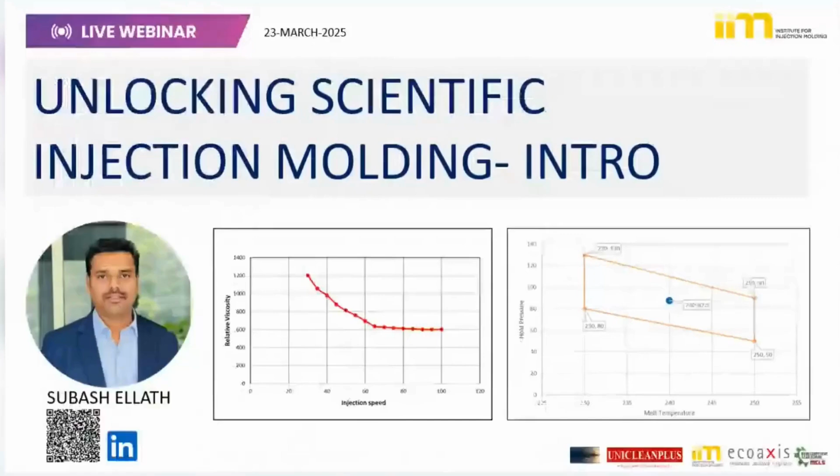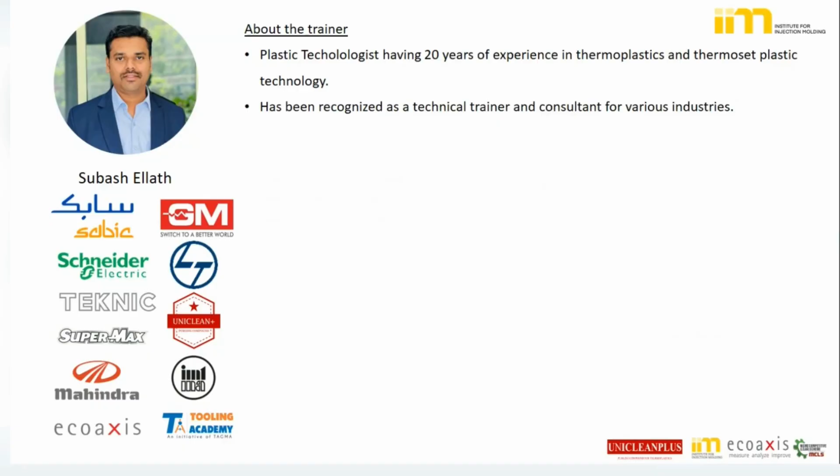I've been in plastic technology, thermoplastics and thermoset plastic technology for 20 years now, and have taken trainings in multiple OEMs. I have hands-on experience in mold design, product design, mold making, rheology, mold flow, plastic raw materials, application development, injection molding process, molding machines, mold trials, troubleshooting, and SOPs and setting up systems.

Recently, for the past 5 to 6 years, I have been offering training in many OEMs in India and tooling companies. I worked with Supermax, the razor manufacturing company, then Teknic, Larsen and Toubro, then Schneider Electric, Sabic as All India Technical for Specialty Portfolio, and GM Modular. I've also been associated as a trainer at Mahindra & Mahindra, IMTMA, and TAGMA.

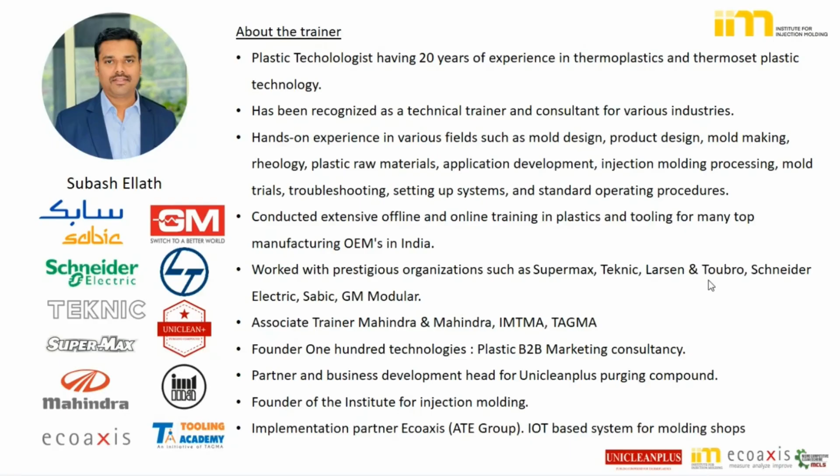Actually, I started the training with a vision. I used to travel a lot in the industry, attending problems, and I'd see that the problems keep repeating - the same customer, multiple customers, also the same problem. So how can one person go and attend to all of it? It's not possible. That's why I became a trainer.

My vision is to advance the Indian plastic industry, molding and tooling industry. Currently we are struggling to qualify, struggling to export critical parts. When we talk about fit and function parts, yes, we can. But when we talk about critical parts which need repeatability or very close tolerance, India is still not an option for the globe. So my intention is to bring that capability in India.

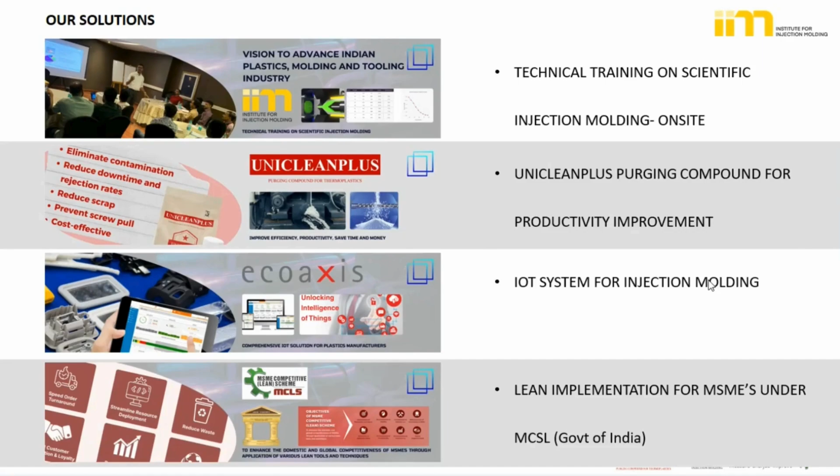So currently our solutions: we take technical training in companies, second, we supply Uniclean Plus Purging Compound, and IoT driven EcoAxis, and lean implementation. Government of India - our organization is a lean implementation partner for QCI, Quality Council of India, under the Government of India initiative of MSME, MCSL.

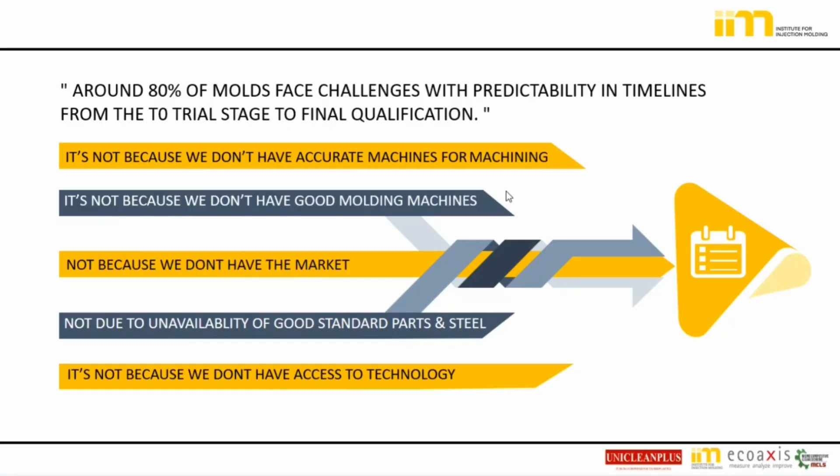And it's not because we don't have access to any technology - we have good technology machines, access to rheology platforms, raw materials, everything is there. Then still, why are we struggling? What is the real challenge? This is as per my observation, and the basic challenges we are facing.

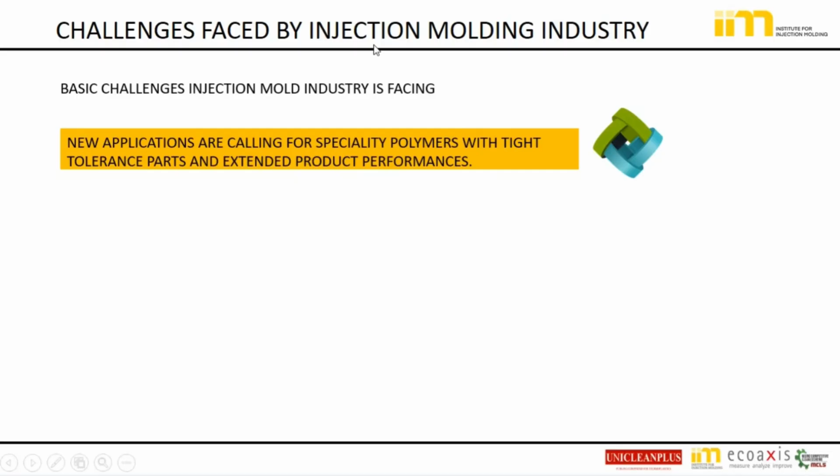There are a lot of new applications coming up nowadays, and instead of commodity plastics, nowadays the arena of specialty plastics, higher-end plastics, polymers with tight tolerance - which require a tight tolerance pattern, or extended life, more life expectancy - this is one of the challenges.

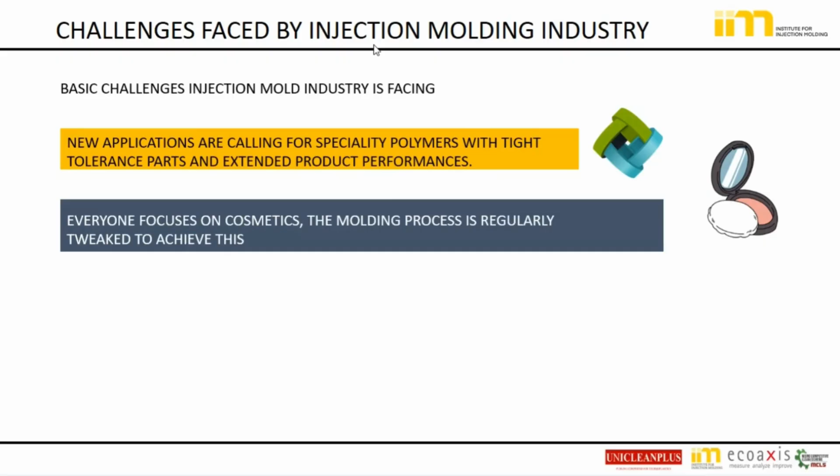Everybody - I openly tell you - everybody is focusing on cosmetics, how the part looks, rather than function. The cosmetic appearance is achieved by adjusting the molding process. The molding process does not have any window, and we keep on adjusting the molding process. The molder is so much dependent on this to get a good part. There is a huge skill gap. Mold making industries have become like an experiential craft.

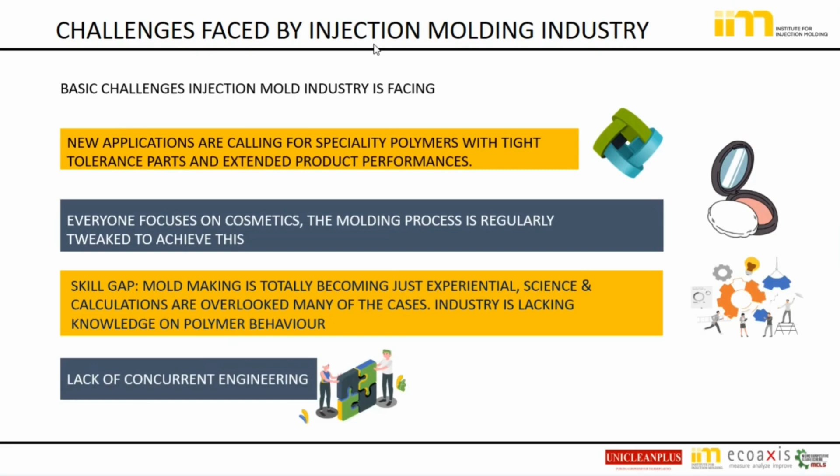It's like we tell it's a real science, but the science has become like an art, and the science and calculation really overlooked many of the cases. Industries are lacking somewhere in related knowledge of depth of polymers and lack of concurrent engineering, because interdepartment, design department may have some knowledge, molding people have some knowledge, tooling people have some, product design has some knowledge, mold flow people have some knowledge. We are not converging, and interdepartment concurrency is not happening because there is some gap in the knowledge. One person's language, the other person or department is not able to really understand. That's the thing I observed, and for this reason, I started to research, train, and started making.

Now we directly go to what is the real expectation from an injection mold or a molding, whatever it is, for any manufacturing if you consider. So the real expectation is consistency. If I tell the consistency means, whatever today I produce, tomorrow if I produce from the same mold, it should have the same dimension. Consistency can be dimension, cosmetics, how it looks, performance, overall quality, mechanical property, thermal property, electrical property - whatever I am producing now, it should be repeatable, it should be consistent. So consistency is the real expectation. Some people wish to know about molding, wish to know about product design, but the industrial requirement or the real expectation of the whole industry is getting part repeatability, so that our life will be easy, we can run the part very easily. So that's how this can be achieved as a question mark, but this is the real expectation of the industry.

See, when I talk about consistency, there are 3 levels of consistency if we consider a mold as far as a mold is concerned, as far as molding is concerned. First level of consistency is cavity to cavity consistency. Courtesy to Suhas Kulkarni, FimmTech, I've taken this from his teachings.

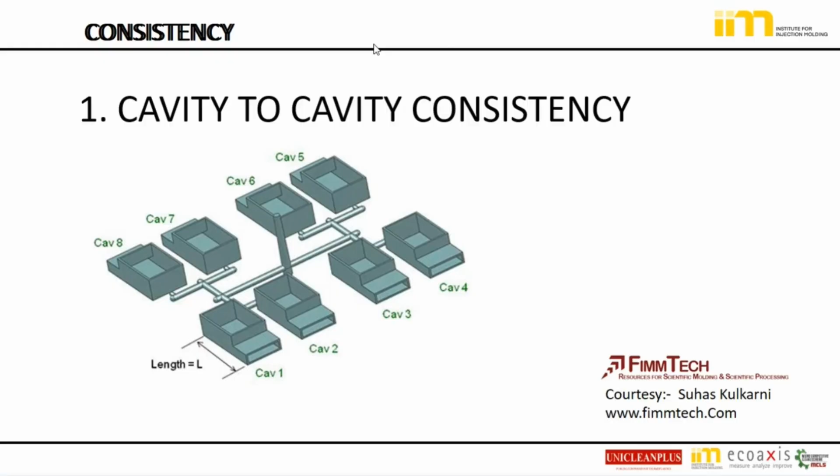So first level of consistency is cavity to cavity. If we have a multi-cavity mold, suppose 2 cavity or 4 - here I've shown an 8 cavity mold - all the cavities in the mold should behave the same way. If one cavity is not behaving the same way, one cavity is getting different dimension, other is getting different dimension. Even if we are modifying the process parameter also, we will not be getting the result. So the uniformity of all the cavities is the first level of consistency. All the cavities behave the same way. Any process tweaking, any change we have done in the process, all the cavities will reflect in the same way - be it dimension, be it filling pattern, be it cosmetics, how it would look, and mechanical performance, overall quality - all should be the same. This is the first level of consistency.

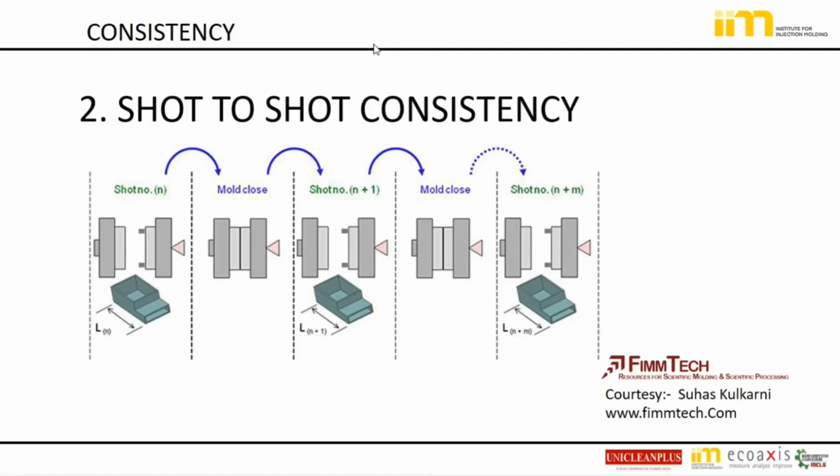The second level of consistency is known as shot to shot consistency. It means first shot to second shot, to 10th shot, 10th shot to 50th shot, 50th shot to 100th shot. So all the shots coming from the mold, first all the cavities are the same. But suppose we have been seeing like in the morning the part is coming good, and after some time there will be some issues, some catching, some dimension deviation, warpage coming - all the things are coming. So the second level of consistency is shot to shot. All the shots also should behave in the same way, consistent and repeatable.

Third level of consistency is run to run consistency. It means today I ran a mold, or I ran the mold for 2 days, my production is done, I downed the mold. I used another mold in the same machine, and after 1 month or 6 months, again I up the previous mold and started. Sometimes we have been seeing that we are not able to - people have been saying, look, last time it was coming good, and with this, no, it is not coming good. What has happened surprisingly?

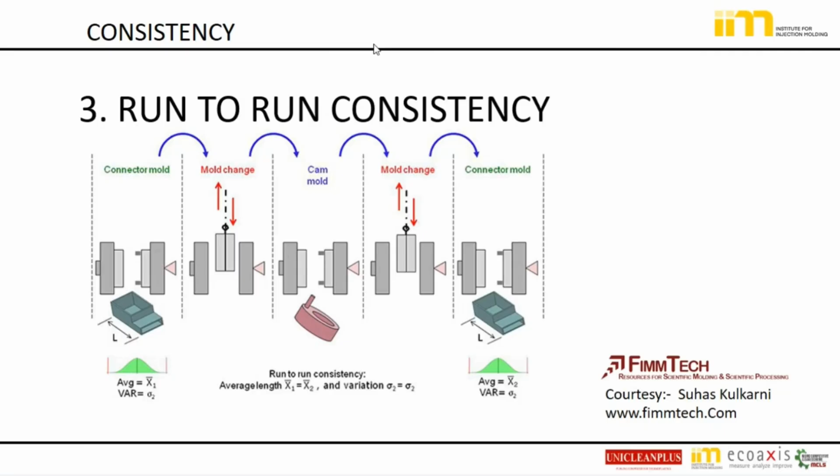So the third level of consistency is run to run. Whenever you run the mold, after a break or whenever you run it, even after 1 year or 2 years, the mold should perform in the same way, and the part should have all the consistency in terms of dimension, maybe cosmetics, overall property, mechanical property, overall quality, whatever it is. So if we are able to make a mold or process like that, where all this consistency has been met, then we will be in a safe condition. Our life will be very easy, the toolmaker and the molder's life will be easy. Even if a problem comes, that should also be repeatable - it's not like a problem is coming today and tomorrow it has vanished. So repeatability is the core of the manufacturing process. This is the third level of consistency, what the real industry has to go for, and that is the real expectation.

Now I'll talk about some of the variation. So is it so easy to meet all this consistency? No. You people are already from manufacturing, you'll be knowing it's not an easy thing. Plastic molding, plastics are really tough material. If you think about it, there are a lot of properties or a lot of things that come together and give the quality of the part or the repeatability of consistency.

Even though our mold is good, the machine is fantastic, we have all the accessories, everything right, still there are some factors we maybe overlooked, that are natural variation, that result in the polymer flow behavior itself. There will be some viscosity change or flow behavior change. These things are out of our control, really speaking. Whatever best of the machine we keep, still these are out of our control.

One could be polymer MFI variation. If the molding material that we are molding is, suppose, the 10 MFI grade, that means its viscosity - MFI is related to the viscosity or the thickness of polymer. The data sheet shows the typical value of 10 MFI, but not all the lots will be 10 MFI. There will be a variation.

So where is the polymer coming from? The polymer is coming from a huge value chain, the crude oil, then from the crude, like petrol comes, diesel comes, kerosene comes. The building blocks of the polymer, also naphtha, ethylene, all this come from petrochemical. Then it is polymerized, monomers are made, then polymerization, and then compounding is done. So it's a huge value chain.

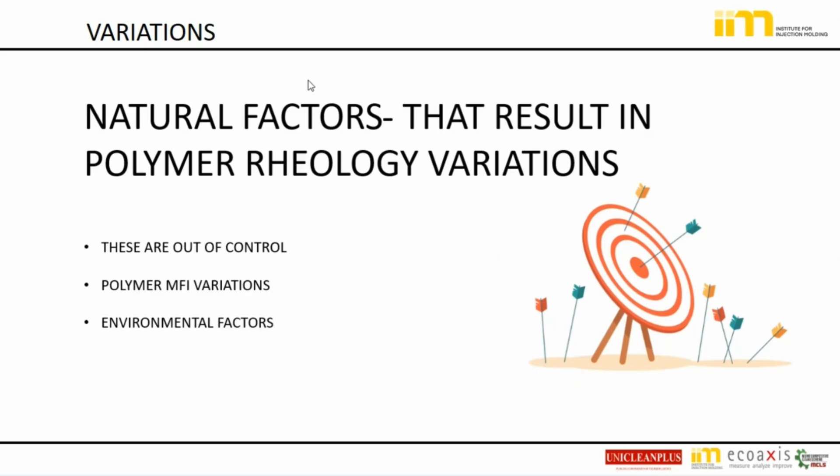And not only polymer variations, environmental factors too. Morning has a different temperature, noon is different, evening is different, winter, summer - every time there is a variation in the environmental factor, and the mold and the machine, everything is in that environment, and this factor also interferes with the consistency. So these are the factors which are really out of our control. Whatever is within our control, we may be able to manage, but there are a lot of things out of our control.

And even though a lot of things are out of our control, this natural variation, can we still produce a part which gives consistency? Even with raw material change, atmosphere or condition changes, can we still produce a part which gives repeatability? Can the mold give repeatability?

So for this reason, scientific injection molding is the real saver. Scientific injection molding is also known as decoupled injection molding. So how does the decoupled name come about? When we are injecting a part, when we inject the molten plastic into the mold, there are two phases - one is injection, second is holding phase. When we separate both, when we think of injection separate and holding separate, that is known as decoupling or decoupled injection molding. Ideally, 95 to 98% of the filling of the part should be done by injection, and the rest 2% to compensate for the shrinkage or volumetric shrinkage should be done by holding or packing.

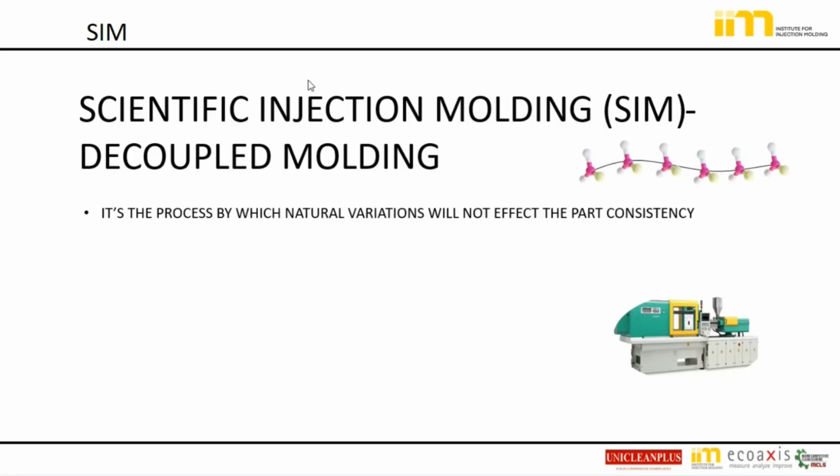So this is the process where natural variation will not affect the part consistency. Even with natural variation, it will not affect the consistency - we are saved. The process respects the polymer's inherent behavior. We may think the tool is like this, the machine is like this, the tool has been done, but the basic polymer property never changes. If we are able to capture that right, then you'll be able to do it. So here we'll be respecting the real property of the polymer to get consistency.

The results are completely dependent on the creator, the mold designer, and the qualification. The results don't depend on molding or setting. Molding and setting will be very easy actually if you're able to take care. The real result, if you want scientific injection molding to answer, the things have to come from the mold. We have to check some things when the molding is done, but very few things. We don't need to be a master at operating the injection molding machine. We just need to take 2 or 3 parameters, that's all. Looking at that, we'll be able to understand whether the mold will give repeatability or not.

95% of the quality lies in the mold designer, and just 5% of the setting lies with the molder. It's a very easy process. I call it scientific injection molding, but honestly speaking, it should have been called the science, the real science of injection molding. There is nothing better than that. If you remove all the unnecessary things from molding and put in calculations regarding raw material behavior, whatever is left back is scientific injection molding. It's nothing like rocket science or some new thing that came into the market.

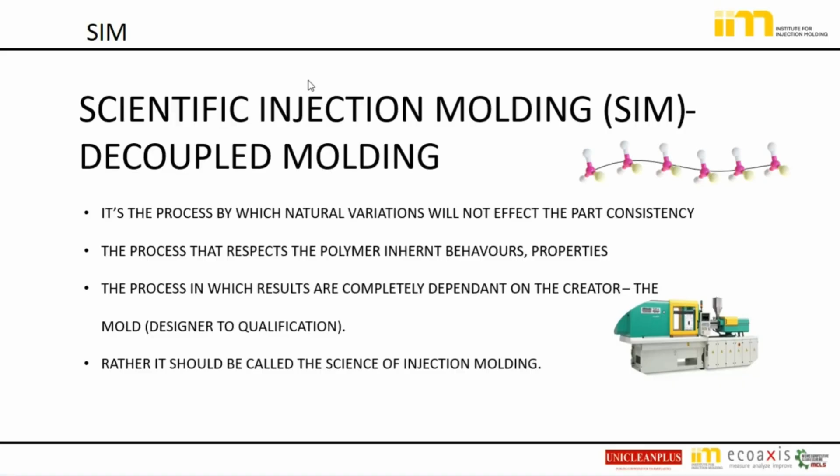Everybody should know this if you want to think about consistency, not just making a part that looks good, but one that is repeatable. So to know about scientific injection molding, it's very important to know one property of any polymer or fluid, known as Newtonian and non-Newtonian property.

So what are Newtonian materials? I've shown some examples like oil or water - the material or fluid whose viscosity remains the same at different temperatures. Suppose I'm passing water through a pipe, and the output is 10 liters per minute, and the temperature of the water is 30 degrees. I change it to 35 degrees, 40 degrees, or 50 degrees - the amount of water coming out will not drastically change.

That means the viscosity of water will not change with respect to temperature or shear rate. If you rub your hands together, you can see there is molecular rubbing happening, which generates heat. So the more the heat, the viscosity should shift. But in case of water, a Newtonian material, there will not be any change in viscosity with respect to shear, which is correlated to temperature. But in case of non-Newtonian material, it's not the case.

With every degree of temperature change, the viscosity keeps on changing. For example, if you are injecting or molding ABS at 200 degrees, and if the part is not filling, you will increase the temperature and fill the part, right? How is this happening? It's because with the temperature rise, the shear rate is increasing, and with the shear rate, the viscosity is dropping and becoming more and more fluid-like, like water. So that type of material which changes its viscosity with respect to shear and temperature is known as non-Newtonian material.

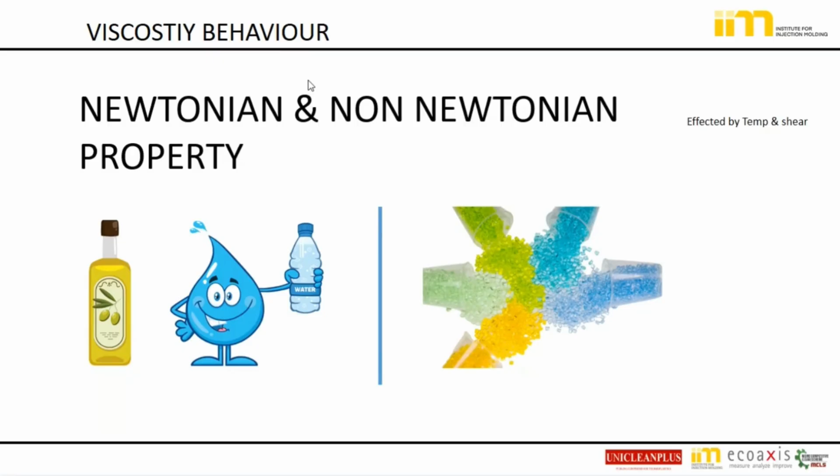So if we are operating in a non-Newtonian zone, forget about consistency. We have to find out that sweet spot where our polymer becomes Newtonian when we are injecting. Understand this is a very important factor for achieving consistency.

So what is the advantage? I'll be going through those things. What are the steps? What is the advantage of scientific injection molding, or SIM?

Since I am operating in the Newtonian area, where my polymer viscosity will not change with respect to shear - yes, there is such an area - my part will be super consistent. I'll get a very good, improved consistency.

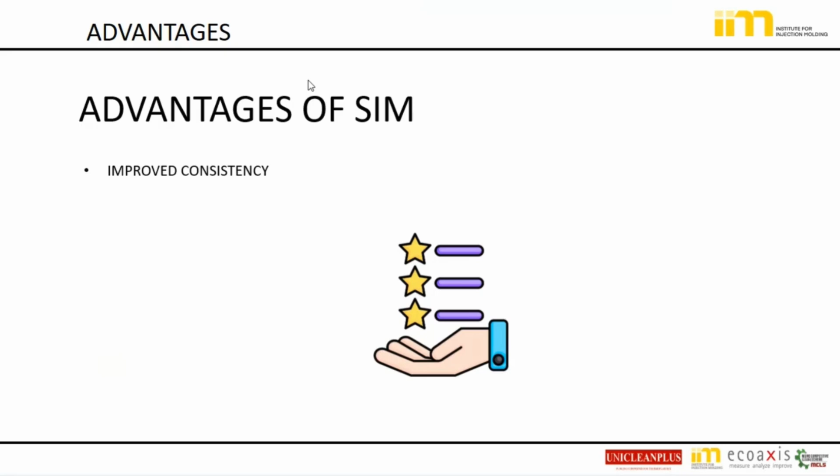And this is data driven. This is not a hit and miss approach, where some problem comes and somehow I solve it. No, this is data driven. There is a step by step procedure for qualifying the mold. Very proper steps are there, not just trial and error.

And this is robust. These are very robust steps for qualifying and getting repeatable quality. This is a very robust set of steps we have.

And it reduces defects. We will not get any surprises, like the mold suddenly running inconsistently. No, the consistency is there, so we get much reduced defects, and obviously better efficiency in terms of your capex and mold or machine utilization.

It's a very efficient process in terms of cycle times, and you don't have to keep on tweaking the molding process. The process itself has its own control. There's no need for an experienced person to always keep adjusting the process parameters to make the part look good. That's not required at all.

And this gives very good, predictable timelines. If we commit something, you know when it is going to finish, because the rejections are well under control. Obviously, there is lower part cost when we go for scientific molding - you get better cycle time and better injection time.

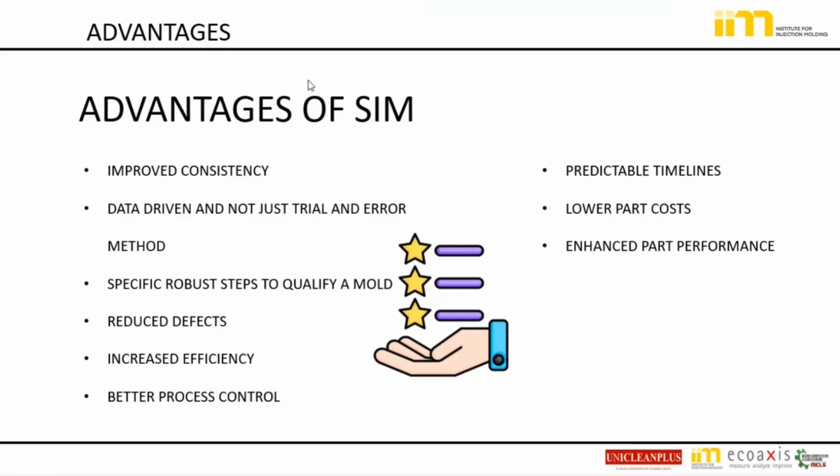This process respects those things. We consider the raw material property in processing, and we design the mold also as per the raw material property - really speaking, not just filling. Filling alone is not the quality of the part - filling can be done somehow with pressures and all. This is about preserving the raw material property without inducing stress in the molded part, so as to enhance very good performance of the part. Maximum performance can be achieved by doing SIM.

And troubleshooting itself, root cause analysis itself, becomes very easy. Otherwise, we have to rely on trial and error, keep on doing it. Here, it will be very easy.

Okay, these are some of the advantages. So how to achieve consistency through the scientific injection molding way - those were the advantages, but how can we do this? How can consistency be achieved this way?

So scientific injection molding is carried out through a 6-step study. There are 6 steps to it. We have to properly go through those steps during qualification of the mold - I repeat, during qualification of the mold. This is not something done once your production has been running for years - no, it can be done, but if you want the result...

I told you the creator is responsible at the time of creation of the mold. If you're able to take it at that stage, then - I've seen many people have scientific injection molding worksheets or spreadsheets that don't get answered. The thing is, if it has to be answered, then the tooling - basically the feed system and the cooling - I can tell you the feed system is a very important criteria. So that has to be gone into in depth.

The 6-step study is known as scientific injection molding, or decoupled molding study. The first step is the viscosity study. I'll be showing that just now.

In viscosity study, we'll be identifying where is the Newtonian area for that mold, that runner, that part, and that combination of raw materials.

Second is gate cavity balancing, meaning whether all the cavities are filling the same way, cavity to cavity balancing. That is the second study in the 6-step study. We'll be seeing this physically, and also weighing the parts.

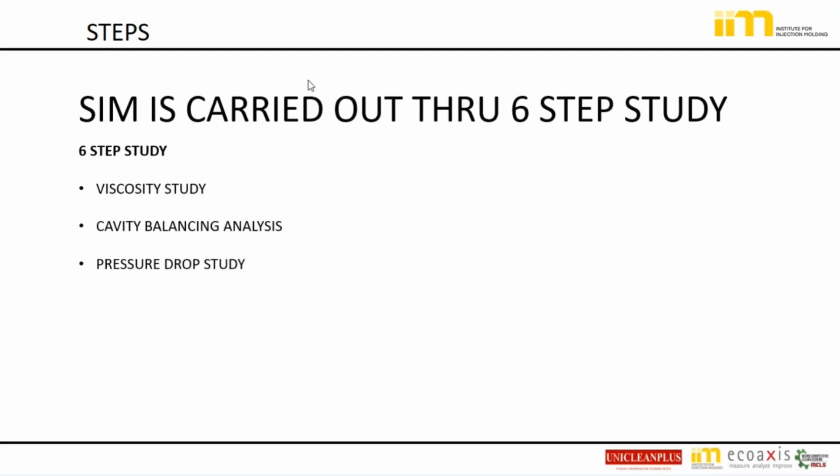So this is the third one, and fourth is the cosmetic window. The first 3 things are really about process setting, optimization of injection, and all these things. Then comes cosmetics - when the process is set, we talk about cosmetics like sink mark or flashes.

This is a cosmetic or aesthetics thing where holding comes into picture. Till that point, we'll be injecting the part without holding. And then comes the gate freezing analysis.

If you talk about the gate, it is the smallest area in our system, the mold. It's the first area to freeze or lock, where the metal gets frozen, not the gate itself last. So once the gate is frozen, metal will not go inside. If the gate is frozen and you are getting a lot of sink marks or defects, then whatever pressure you apply from the backside of the machine, nothing will go inside. So it's ideal to understand what is the real gate freezing time.

When we talk about raw material, there are 2 types. One is amorphous, like polycarbonate or ABS, and the other is semi-crystalline, like nylons, PBT, and POM. Both materials behave totally differently. To get the crystallinity in semi-crystalline materials like nylons, to get the utmost mechanical properties, or in POM, to get dimensional stability, we have to make it crystalline - these materials need a higher crystalline percentage.

So to make the cell crystalline, we should have a higher gate freezing time so that we are able to pack the part properly. Gate freezing study is one of the important studies that gives consistency.

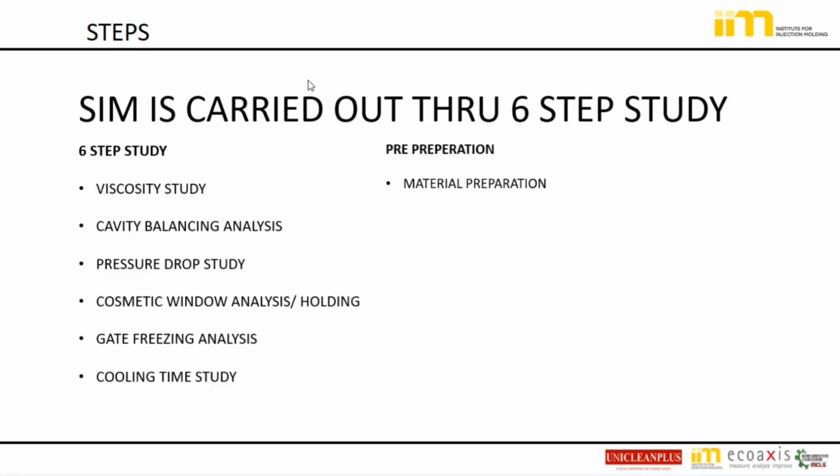Every raw material has its own drying requirement. If I talk about preparation, it could be drying, pre-drying. Drying times have a cumulative temperature. Some critical materials have a very close, lesser cumulative drying time limit. Not just drying time - cumulative drying time means if you are repeatedly heating a material. Today I loaded a material or a mold and ran it for half an hour. Suddenly there's a mold breakdown, I took the mold out, and the material is collected back. Tomorrow I fix the mold and again I am loading it. Like that, multiple times this can happen. If you add up all the drying times, that's the cumulative drying time. For critical materials, if the cumulative drying time is exceeded, you'll be in trouble. So these things also have to be taken care of.

Then the melt preparation - what the melt temperature is, and not only keeping the melt temperature but measuring it. Whatever we give in the machine, setting in the machine, the thermocouple reading - so, following the 30-30 principle with a copper pyrometer, we have to measure the temperature as per the data sheet and as per consistency. So measurement and preparation are both very important.

And then mold temperature. For every raw material, if you see the data sheet, especially for critical specialty and engineering plastics, there will be a prescribed mold temperature. It is not just to cool the part. Suppose a raw material is injected at 300 degrees, we have to cool the mold to 120 degrees. It's not just for cooling the part or for easy ejection. It is for the molecular structure to align. Amorphous has one structure, semi-crystalline has another. The molecules arrange properly according to the molecular structure, and only then do we get the required property.

So if you overcool a semi-crystalline material, the crystallinity will not be able to develop fully. You will never get dimensional consistency, warpage consistency, or repeatable mechanical properties. So mold temperature is for that reason - not just to make cooling happen by giving cooling water here and there. That's not the right approach. Wherever the problem is, we have to attend to the mold and correct it. It's not so complicated once you get a depth of understanding of that.

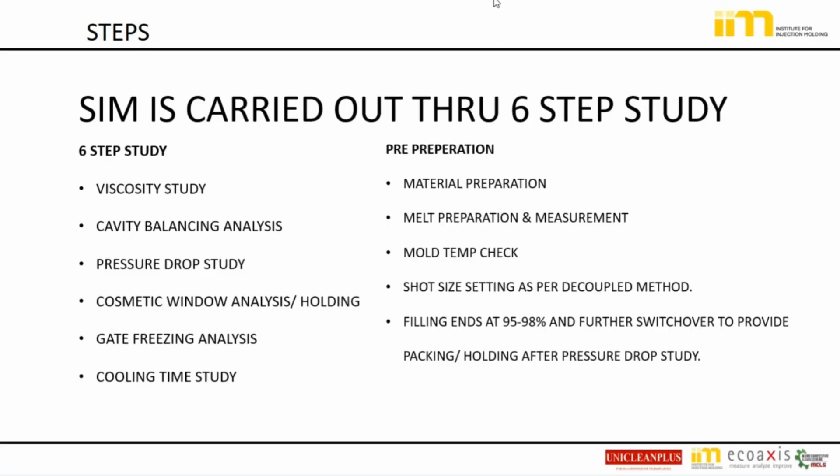Then after all these things - this study, the viscosity study, cavity balancing, pressure drop - only then do we go for giving the holding. Until then, holding has to be kept at 0. So this is the step - first is the viscosity study.

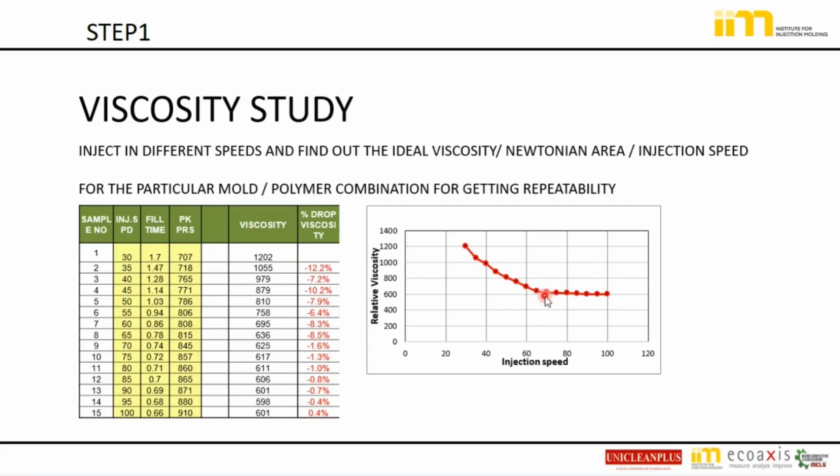Then second is the cavity balancing. In cavity balancing, without holding, here we will be understanding different cavities. We will be measuring the cavity, taking out each shot, like 10 or 20 shots, and measuring the 3-digit decimal milligram type of weight balance.

So generally, without giving holding, if your part is getting within 5% weight, then it means when you are giving holding, you will get a very good repeatability in the cavity. It's 98% of the part switchover, you are getting a 5%. This analysis is done to understand that 5 is a good thing.

But suppose it's a bigger part and all, you can go for 8 to 10%, also very common like automotive type. But for small critical parts, where we are talking of consistency and criticality, then we have to talk about 5%. And some people do 50% filling also, where the part is filled only 50%, and 15% difference also is acceptable.

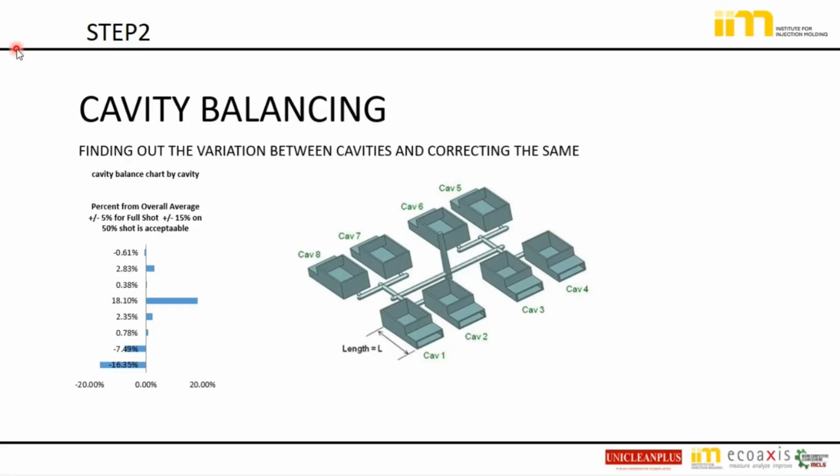If you are able to meet this, cavity to cavity consistency comes only if the steel is machined the same, the feed systems in all cavities are behaving the same, the filling pattern is the same, the cooling of all cavities, the venting of all cavities. So if we are not getting any balance, we have to check the possibility of why it is so. This also calls for cooling correction.

And the third thing is the pressure drop study. So here, what we will be doing - we know that when molten metal is being injected inside the cavity to the part, the nozzle is first, the pressure drop happens, the machine knows it.

Second, it happens at the sprue bush. Third, if there is a primary runner, secondary runner like that - if there are multiple runners, a primary runner then secondary runner, there will be some pressure drop. Then one of the major areas, the gate area, there will be a pressure drop. And then after the gate, the cold part is there. So this is how the pressure drop happens in the system.

So we should know what is the real situation. There is a study we can do in the machine. That's why if you tell first time right, there is nothing called first time right, because the pressure drop can only be determined when the mold is loaded in the machine, because the resistance of the machine, the resistance to flow in the mold, the gate, the real cavity and all - we can only know when the mold is in the machine.

So first time right, in case of molds, for me it never happens. Every time there will be some modification. If you have done a mold and copied it exactly and your old mold was having all the consistency and all, that's a different case. But otherwise, there is nothing called first time right as per me in the molding industry. You can make it second time right, not first time right.

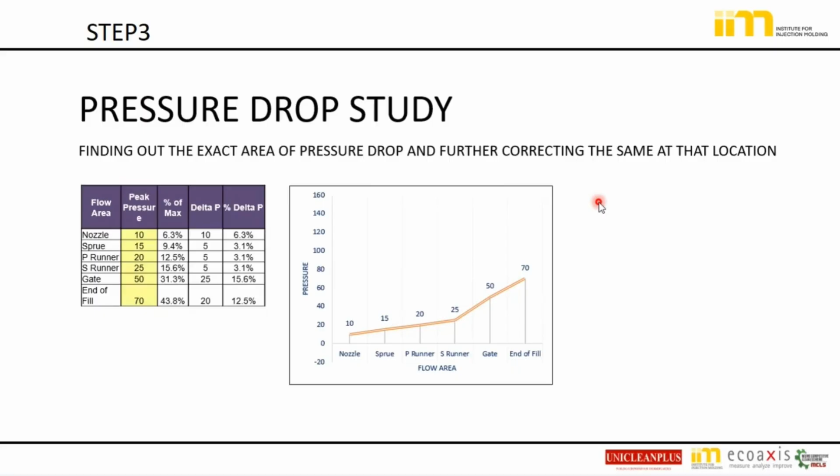Sometimes what happens is we keep on correcting the gate, and it may take one or two months of R&D. Finally we find out it's not getting filled - the machine is injecting and some sound is coming from it. Later we tell the customer, oh, this is a part problem. Why wait for that? You don't have to wait, because this can be done at the T0 trial itself. This is how the pressure drop study has to be done - find where the pressure drop is, and correct it there. That's all.

Until the fourth stage, we keep holding at 0, treating molding injection and holding as separate. Sometimes when I go and check, with holding at 0, suddenly the part becomes like 50% filled. That's not right - you want a consistent fill of 95 to 98% by injection only. If you remove holding, the part may show a sink mark - that's the right condition to check, no need to always wait. So till that stage we keep the holding at 0.

Now the cosmetics. So processing means really understanding the viscosity in the Newtonian area - the real injection speed is the key. After that we start holding. In the cosmetic window, that's where we do the holding.

We'll do this DOE in two steps. First with the lower melt temperature, I'll keep reducing the holding pressure. If you keep reducing holding pressure, there will be an unacceptable limit where the part shows a sink mark - I'll note that down. Then I keep increasing the holding pressure, at the same melt temperature. After some time I get a good part, then I'll get a flash. So there are two extreme conditions of cosmetics: one is flash, the lower end is the sink mark.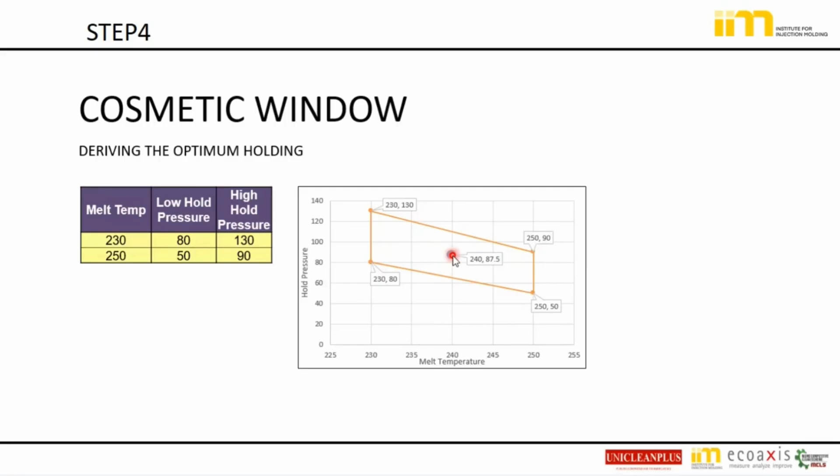With that data, a window is created, and from the center of that window we can apply the holding and proceed forward. This is optimum - any minor change in the polymer or process, we'll still get acceptable parts. There's a big window where all our parts are acceptable. This relates to how the polymer behaves - pressure, volume and temperature (PVT). Whatever minor changes happen, the part will still be accepted. This is a box where we identify the holding window that gives an acceptable limit, and while running the part we keep it in the center area and proceed. This is what the cosmetic window is.

And then after cosmetic window, it's a gate freezing study. As I told, gate is the first area to freeze in a mold. Suppose the gate is freezed. Everybody knows that plastic, when it flows, it flows, but the moment it stops, plastic is not like water or oil. The moment it stops the flow, it freezes off. Then no matter how much pressure you apply from the backside, nothing will go inside. So gate is the area where freezing happens first, it's the name itself, gate. When the gate is getting closed, we cannot go in the similar way. The gate is closed in the mold, polymer cannot go inside.

Once we get into this, the first study, second study, third study are already over. We don't go back. If the cavity balancing is not happening, we have to correct the mold and bring all the cavities to balance, then again load it and start from the beginning, because the moment you correct the gate, viscosity changes, so again we have to start from the beginning. That's how we reached this stage. It is not like we directly run all the studies, finish, and visit with that Excel sheet. No, if one study is not answering, we have to correct it. If it is answering, only then we go to the next. If that answers, we go to the third step. If third is not answering, we cannot go to four. No need to go to four. Stop there, understand it, correct it, and come back.

Then is the cooling time study. Cooling, as I told, is 60% of the cycle time. So if you want to save money, there's more saving in cooling than anywhere else. It's not just about adjusting the cooling time in the machine - the mold should take care, meaning there should be enough cooling lines in the mold. Looping should not be there. Mold is a thermal system, and proper thermal conduction is needed. If I tell you, there is no upper limit to the cooling lines.

So here what we are doing is starting with an optimization - we wish to reduce the cooling time. We start with a higher cooling time, suppose 20 seconds. We start with, suppose this raw material's HDT, heat deflection temperature, is for polycarbonate, the heat deflection temperature is 120 degrees. This means I can eject the part out below 120, there will not be any deflection. That is good enough - maybe 110 or 100.

So here what we are doing, I put at 20 seconds, then 19 seconds, keep on reducing the cooling time. Each cooling time we are putting what is the measured temperature using an infrared pyrometer. You can measure the temperature and put it. Touch probe we are using here. The problem is that by that time it cools down, the part that is coming out we have to measure. Suppose here at 20 seconds 80 degrees coming, 19 seconds 90 is coming, 18 seconds 110.

See, all are below its HDT. All these cooling times are okay. But the moment it reaches 17, the temperature has gone to 120, which is close to or same as HDT, or higher than HDT. It is not acceptable. So here, optimum cooling time we can take something like 18 and go ahead. Okay, this is how optimization in cooling time can be done.

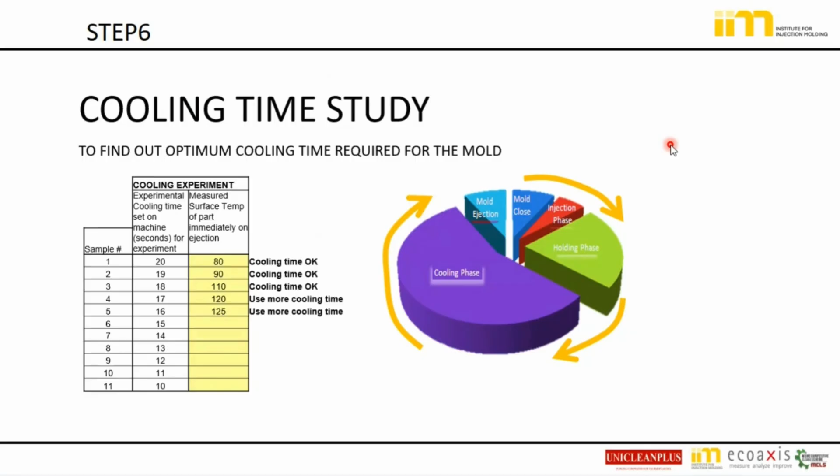Okay, if we are able to do this at the time of qualification and qualify all these things are answering, then that mold will have the most consistency, and the mold, without any interference, without any modifications of parameters, it can be easily run. So that is the thing.

And mold qualification in the same way means, first, never check. It's not that the part came out and you are so happy and you give it to all the people, customer also is so happy. You started measuring the dimension and you corrected something. Later on, you're not able to get the dimension again back. Sometimes you have to throw away the steel and the project also goes out.

No. First is deriving the molding process, meaning the viscosity, the speed, then where is the Newtonian area. That's the first step. Okay. Newtonian area, then your pressure drop study and cavity balancing. If you have done these 3 things in the process, then only go for cosmetic.

Part is not filled, everybody does something, modifies the gate and all. That's a very layman thing. If part is not filling, nobody has to tell you to adjust something. This is a very common thing.

Even if the part is filling, still understanding the pressure drop, still understanding the Newtonian area, then cavity balancing, that is the science actually. Otherwise it's just something any layman can do. So understanding that and then go for cosmetic looks.

Air venting - if there is an air entrapment happening or burning, go for air venting, not reduce the injection speed. The moment you reduce the injection speed, consistency goes for a toss. You are operating in a non-Newtonian area where you will not get consistency by impact.

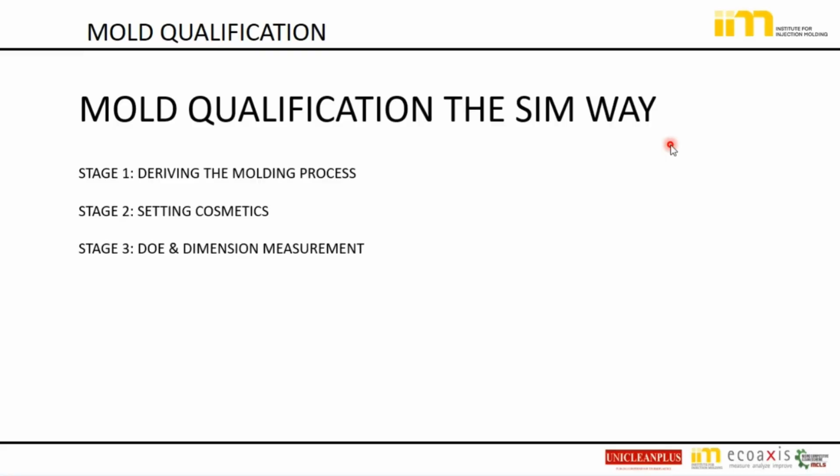Okay, in terms of fit and form this is a different story, but we are talking about critical parts and it's typical. Okay, so what are the prerequisites? See, just getting this spreadsheet is good enough. Can you do the same? No, that's the area where everybody is stuck. What knowledge should we have? We should have detailed knowledge of plastic raw material behavior. I think that's one of the things which is not so much percolated.

See, the raw material behavior, how it flows, what is the shear rate, the fountain flow behavior - all this polymer behavior wise, we should know what is shear rate. Different raw materials have different shear rates. Based on that, the feed system changes, so the flow changes. So these things have to be done.

Then material selection and data sheet. How really can we interpret the data? See, looking at this polymer, just seeing the polymer - oh yeah, I've done this.

Every grade, there is a specific reason to develop a grade. The higher the grade, the costlier the grade, or the higher the property of the grade, it is always very sensitive. We have to take care. If you are not able to take care of that molecule, there will be destruction of the molecule and you will not get the property. So the costly material, I will tell you, is like a stray dog and a costly imported dog. A stray dog, you don't have to do anything, it will take care of itself. The moment you are buying a costly dog, you have to take care a lot, otherwise it will die easily. Similarly, the costly materials, we have to take care, otherwise we will not get any property out of that - we will destroy the property. So that thing has to be understood.

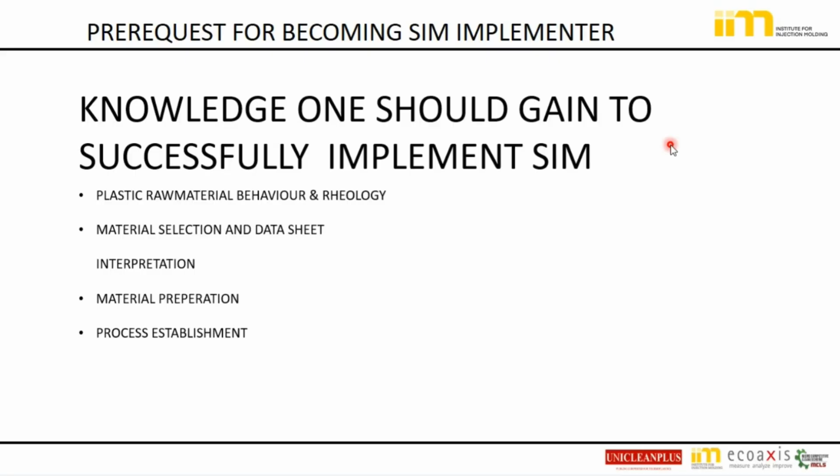Drying also, and then process establishment. Process establishment in the sense is not just simply adjusting and looking at the part - okay, 98% filling and then going to holding. Establishing that 98% switchover, establishing the refilling and switchover ideally to make it 98%, is very key.

Okay, and mold design - we should have knowledge on mold design, especially feed system and cooling. Feed system is very important, not just for filling. The thing is, we never touch the feed system if we are able to get the part filled. The moment filling happens, yes we fill, yes it's done. No, filling is not just the key - filling is only one aspect.

If you are filling with very high pressure, forget about consistency. If you are just filling by increasing the temperature, forget about consistency - your raw material itself you are damaging. So filling with the stipulated thing requires adjustment of the system. Always, if I tell 1000 molds, if I make it in 995 molds, I corrected the feed system, otherwise no. So I mean to say, there is no first-time-right really in feed system.

And cooling, of course, cooling - very good cooling. And cooling is a never-ending thing. Feed system, cooling is never-ending, and even our air venting is a continuous case and continuous improvement. There is no end to that.

Okay, and root cause and troubleshooting - instead of just trial and error, what is the real root cause and how to troubleshoot that. It should be from the product and the mold - it's not just by processing the mold. And the product design knowledge, the thumb rules - which raw material can achieve this dimension.

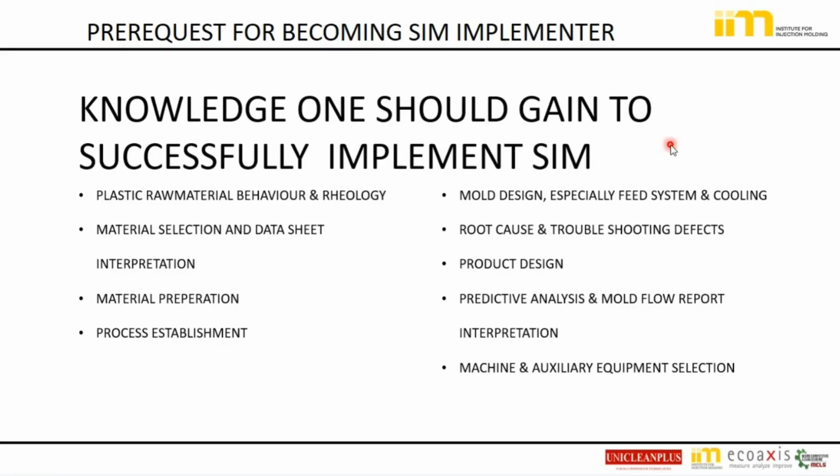And obviously, machine and auxiliary equipment sizing - the size of the machine, calculate the size of the hopper dryer. All the auxiliary equipment, we should know the exact size required. When we are operating with a critical dimension, the raw material will also be critical, so auxiliary equipment selection and sizing plays a very important role.

To end this - consistency can only be achieved when the creator knows the molding process. Creator means the designer or the tool maker knows, and we can identify the root cause - it's not somebody else's job. But I'm not telling you that you should master molding machine operation. You just have to ask what is the peak pressure coming, what is the injection time coming, then automatically viscosity is done. That's all, we don't have to operate everything.

Nobody needs to operate the machine, we just want to capture that data and put it in the graph, and see where the pressure drop happens. Put it in the graph, that's all that's required. The biggest problem is that when we talk about injection molding, people think it's the molder's job. Tool makers say they don't know how to operate a machine, so they think they can't be an injection scientific engineer. No need to operate - just take the reading, put it in the graph.

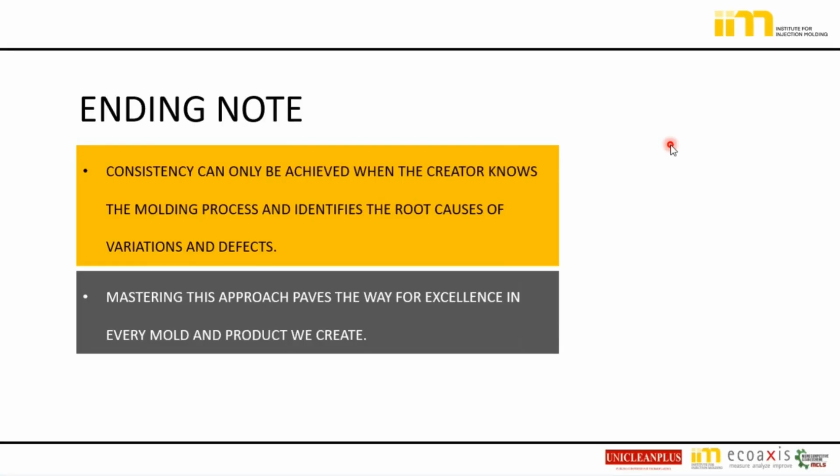That's all. And second, mastering this approach paves the way for excellence in every mold and product we create. That's all, okay.